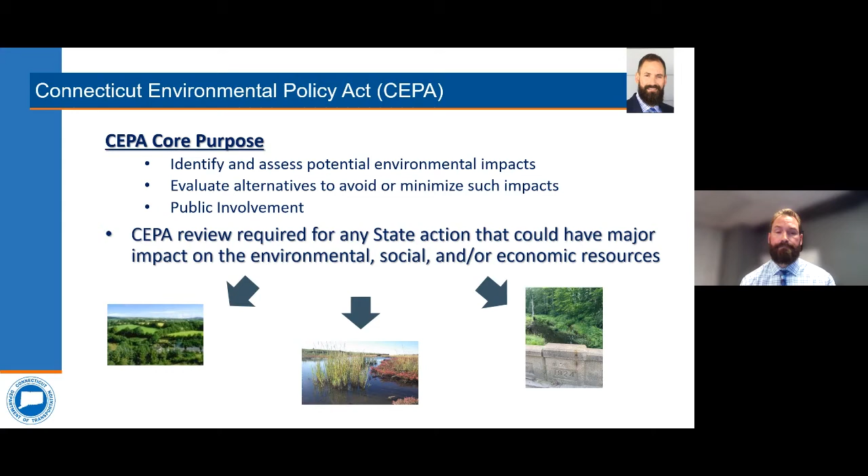We also have to make sure the project complies with the Connecticut State Plan of Conservation and Development. And in the case of this particular project, since it involves federal funding, like the majority of our projects, we also have to look at these resources to ensure compliance with the National Environmental Policy Act, or NEPA.

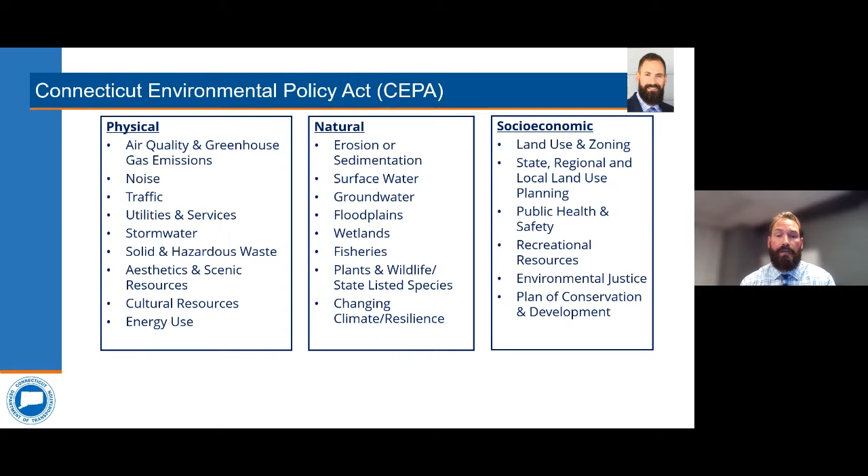Now that you have a general idea of what CEPA is and what needs to be considered under it, what exactly is meant by the term scoping? Scoping is a really specific definition under CEPA, and the scoping process involves a defined set of steps for public outreach. CEPA scoping is defined as the gathering and analysis of information that a state agency will use to establish the extent of environmental review of a proposed state project.

Basically, it's a way for us to get information from the public and other state agencies so we can ultimately determine the proper level of environmental review and documentation needed for a project.

This process begins once we publish a notice of the project in the Environmental Monitor, and that in turn kicks off a minimum 30-day public comment period.

For those not familiar with the Environmental Monitor, it's an online publication run by the Connecticut Council on Environmental Quality, and it tracks projects that go through the CEPA process, including the relevant information for those projects. For this particular project, we published that scoping notice on May 17th, and the comment period will run until the close of business on June 27th.

As I mentioned previously, the idea is to solicit comments from the various Connecticut state regulatory agencies, such as the Department of Energy and Environmental Protection, the Department of Public Health, and the Connecticut State Historic Preservation Office, to name a few, as well as from the various municipalities and the public, to help identify any potential alternatives, and also to help identify any specific environmental resources that need to be analyzed in the project area.

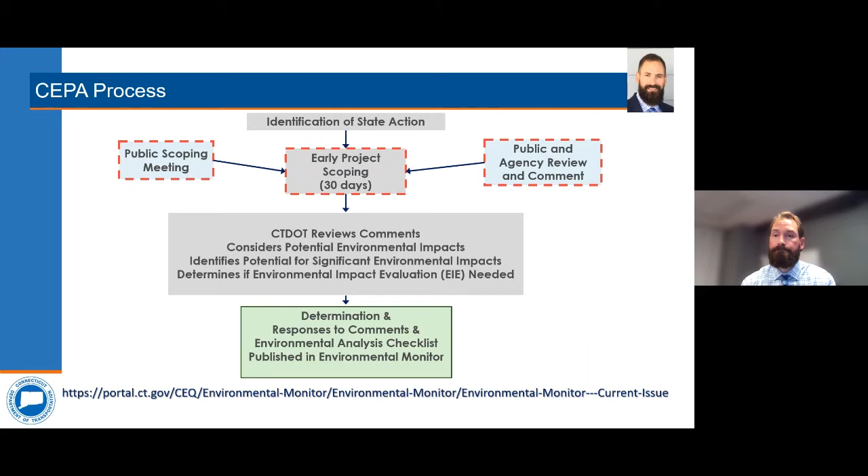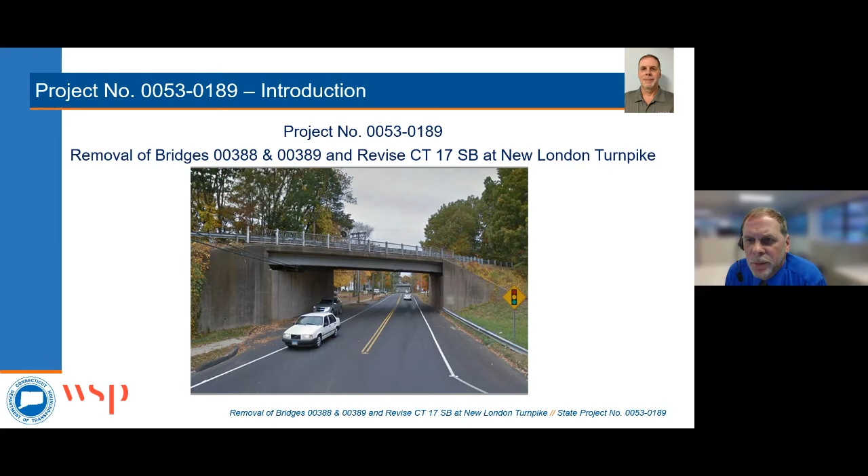Tonight, we will be providing an overview of the project and key details, including proposed plans, an overview of the traffic analysis, discussion of maintenance and protection of traffic, and schedule. I would like to let you know that the plans we are presenting this evening are at a preliminary design level, which is approximately 30%.

I would like to start with an overview of where the project is located. The project is located on the western side of Glastonbury, south of Route 2 and Hebron Avenue. The project limits will extend east-west along New London Turnpike from Sycamore Street to just east of the Williams-Oak Street intersection. The project limits also extend along Route 17 northbound from Hubbard Street to the south to the merge with the Route 17 northbound on-ramp to the north.

Currently, the Route 17 southbound off-ramp splits into two separate ramps at New London Turnpike. One leg of the southbound off-ramp goes to New London Turnpike westbound, and the other goes to the New London William Street East Oak intersection. One of the main purposes of this project is to eliminate the ramp that goes to the Williams Oak intersection and consolidate all ramp traffic to one off-ramp.

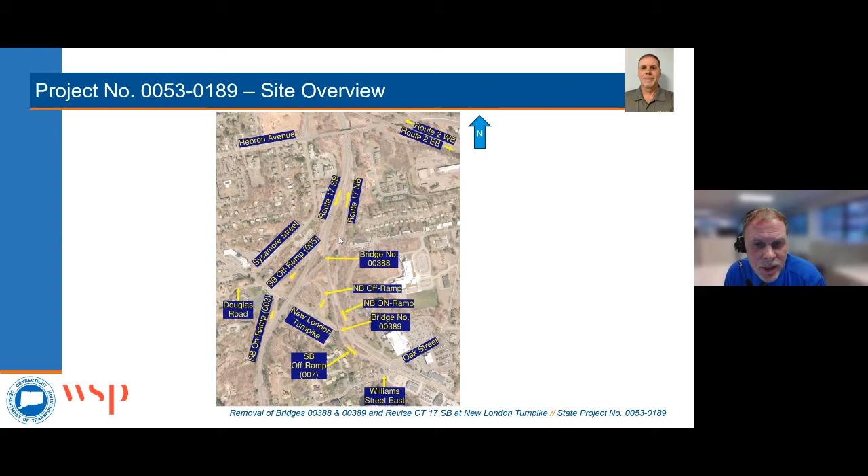This leads into the next slide, the project purpose and need. Due to low traffic volumes and the condition of Bridge 388, this project will remove the Route 17 southbound off-ramp, known as Ramp 7, that currently connects to New London Turnpike at the William Street East Oak Street intersection. By removing this ramp, it provides the following benefits.

One, it eliminates one leg of a five-legged intersection, which improves the geometry as well as traffic flow and safety. It eliminates pavement and two bridge structures along the ramp, one of which, bridge number 388, is rated as structurally deficient and is in poor condition. Eliminating this ramp reduces future maintenance and costs over the long term.

This project will also reconfigure the Route 17 southbound off-ramp, Ramp 5, and the southbound on-ramp, Ramp 3. This reconfiguration will accommodate New London Turnpike eastbound and westbound traffic, as well as all on and off-ramp traffic at a single lane roundabout located just west of Route 17.

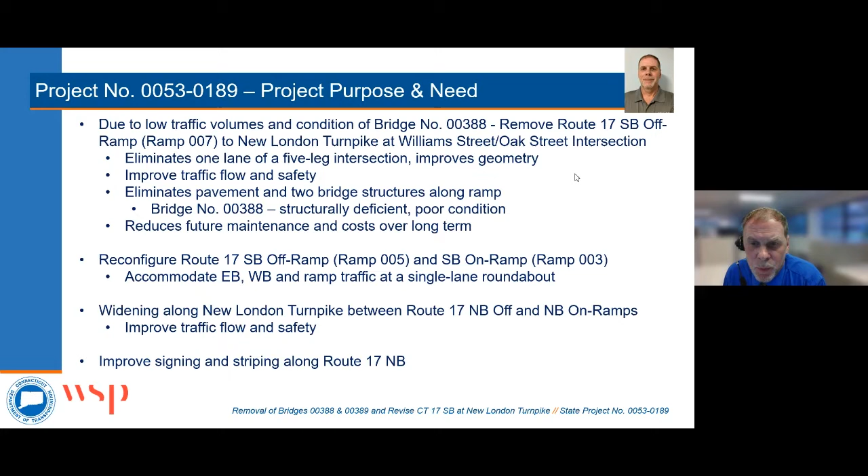This project will also involve widening along New London Turnpike between the Route 17 northbound off and on ramps. This will improve traffic flow and safety within this section of roadway. And lastly, this project will improve the signing and striping along Route 17 northbound, which I'll now discuss.

Currently, Route 17 northbound consists of two through lanes, which start south of Hubbard Street and continue northward. Exit signs for the Route 17 northbound off-ramp to New London Turnpike exit consist of side-mounted signs. The proposed improvements will provide a single through lane along Route 17 northbound, starting at Hubbard Street. The two through lanes will transition down to a single northbound through lane.

A second lane, referred to as an auxiliary lane, will be added from the William Street East on-ramp to the New London Turnpike off-ramp. The auxiliary lane will allow vehicles exiting to New London Turnpike to have a dedicated lane for the off-ramp. A new side-mounted sign will be installed just north of Hubbard Street, and a new overhead cantilever sign will be installed just prior to the off-ramp to New London Turnpike.

This overhead sign will provide improved sightline to vehicular traffic. Additionally, tree trimming will be performed as required for both new signs being proposed. These proposed improvements will provide safer traffic operations for Route 17 northbound traffic at this section of the highway.

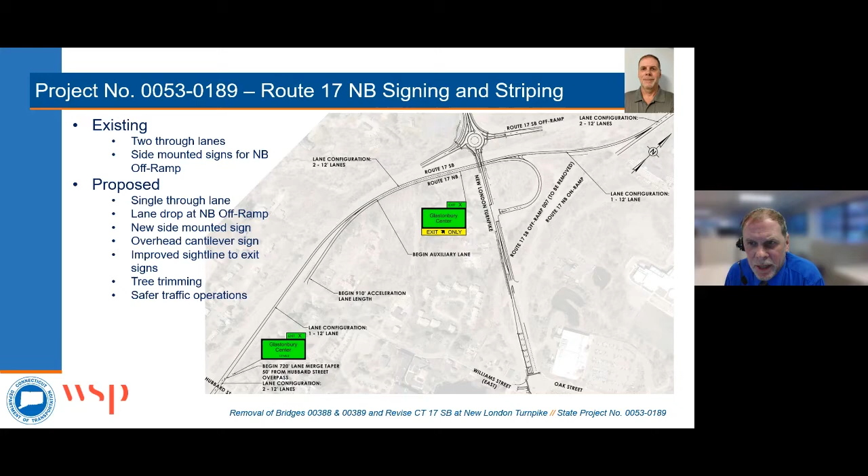Now, moving on to what's being proposed along New London Turnpike. This slide shows the overall improvements being proposed along New London Turnpike, as well as the removal of the Route 17 southbound off-ramp, Ramp 7, that connects at the Williams Oak New London Turnpike intersection. Improvements along New London Turnpike consist of three primary locations.

One, the roundabout and Route 17 southbound off and on ramp realignment located west of Route 17. Two, the widening between the Route 17 northbound off and on ramps. And three, the widening and new signalization at the Williams Oak Street intersection.

The yellow highlighted areas on this image represent where new pavement will be installed. Additionally, new signage and pavement markings will be installed along the improved areas. As seen in the center of the slide, the Route 17 southbound off-ramp will be removed from Route 17 to the New London Turnpike Williams Oak Street intersection. This is approximately 2,200 feet of ramp removal.

Along this ramp, the existing pavement structure will be removed and new grass will be established. Bridge 388, which carries Route 17 northbound over the off-ramp, will be removed, and Bridge 389, which carries the off-ramp over New London Turnpike, will also be removed.

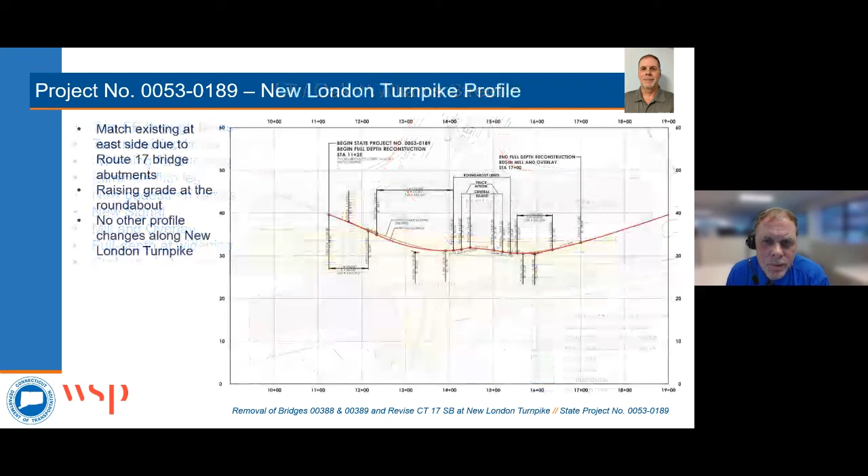Here is the profile of New London Turnpike where the roundabout will be constructed. Looking at the right side of the profile, which is the east side of the roundabout, the profile in this area will match the existing grade due to the proximity of the Route 17 bridge abutments.

Looking at the center of the profile, you can see that there will be a slight raise of the roadway grade at the roundabout. This grade increase is approximately 18 inches.

On the left side of the profile, which is on the west side of the roundabout, the proposed grade generally matches the existing, with the exception that a short portion cuts into the existing grade, to accommodate the roundabout approach geometry and to achieve standard roadway cross slopes in this area. Near the roundabout is the only area along New London Turnpike where there are proposed profile changes under this project.

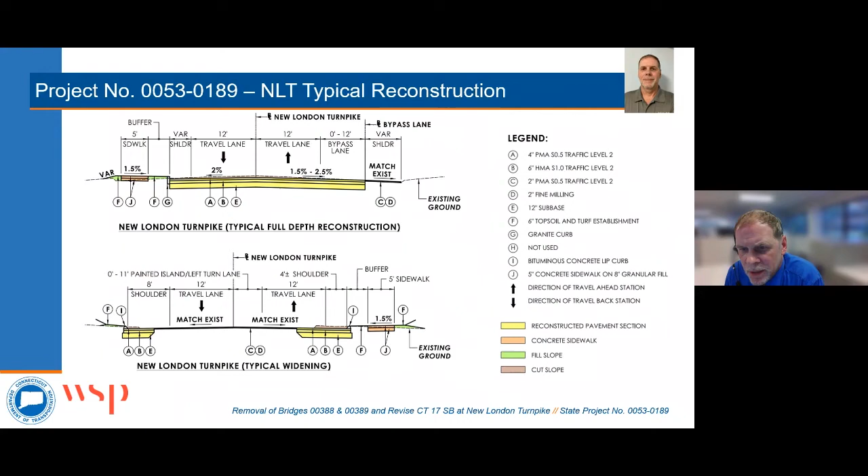I would now like to hand over the presentation to Chris Van Zanten, who is the lead traffic engineer for the project, so he can discuss the traffic design.

Thanks, Steve. Hi, my name is Chris Van Zanten. I'm a senior transportation engineer with VN Engineers. We're working with WSP on the traffic study, traffic modeling, and signal design on the project.

The traffic study includes the following key intersections along New London Turnpike, starting at the northwest Sycamore Street, then Douglas Road, Route 17 southbound on and off ramps, the Route 17 northbound off ramps, the Route 17 northbound on ramps, and the Williams Street East, Oak Street, and Route 17 southbound off ramp.

As part of the study, we performed field review and observations of the intersections along New London Turnpike. We also performed traffic capacity analysis of the existing and future roadway network for both the build and no-build scenarios, to allow for comparison between future conditions both with and without the project, forecasted to the 2023 opening year and 20 years out to 2043.

The no-build condition assumes the existing geometry will remain for these future conditions, and the build condition assumes that the roundabout and all the other geometric improvements mentioned earlier will be constructed.

The traffic projections for the study were provided by the Connecticut DOT Bureau of Policy and Planning and took into account existing traffic as well as future growth in the area. Based on the findings from the analysis, we worked with DOT and the rest of the design team to develop the geometric and signal improvements to accommodate the future traffic while maintaining safe operations for all users of the system.

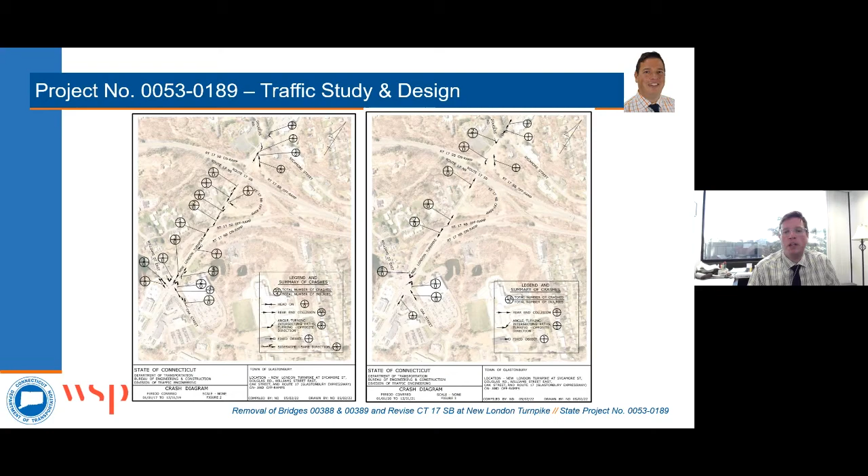Between 2020 and 2021, during the COVID years, there were 14 total crashes with 3 injuries reported. Again, the predominant crash types during this period were rear ends and angle crashes. Crashes were dispersed throughout the study area, with most occurring at the signalized intersection of New London Turnpike with Oak and Williams Street. Next, please.

As part of the traffic modeling work, we investigated the future build conditions of the intersection of New London Turnpike with the Route 17 southbound on and off ramps, two ways: as a signal and a roundabout. Before comparing these options, let's first talk about level of service.

Level of service is one of the performance measures traffic engineers use to assess the operating conditions and capacity of roadways and intersections. It's described in terms of letter grades, similar to the academic grading system A through F, except there's also a letter E. A is the best operation, F is the worst.

We must also make a distinction that level of service criteria for roundabouts and signalized intersections are different. Both criteria are based on calculated delay and V/C ratios, volume to capacity ratios. However, the delay thresholds for determining level of service are much greater for signalized intersections compared to roundabouts and unsignalized intersections. For example, the threshold between level of service E and F is 50 seconds for a roundabout, but 80 seconds per vehicle for signalized intersections. This is based on driver expectancy for the different types of traffic control.

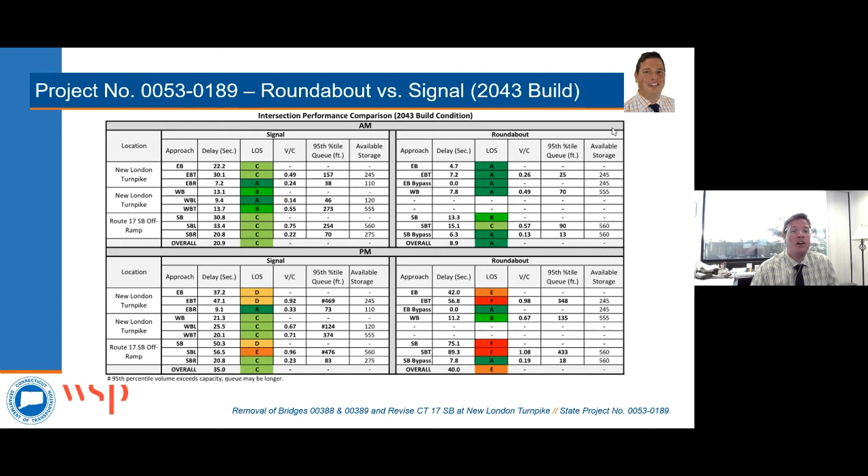The signal currently operates with the eastbound New London Turnpike traffic with an advanced phase, followed by a phase where both approaches on New London Turnpike are able to proceed. Following this phase, the Route 17 southbound off-ramp traffic runs. Lastly, both approaches from Williams and Oak Street are provided a phase with no protected left turns.

The existing signal phasing does not operate efficiently, and all other movements at the intersection must stop when the Route 17 southbound ramp traffic is moving, for a relatively long 20 to 30 second phase.

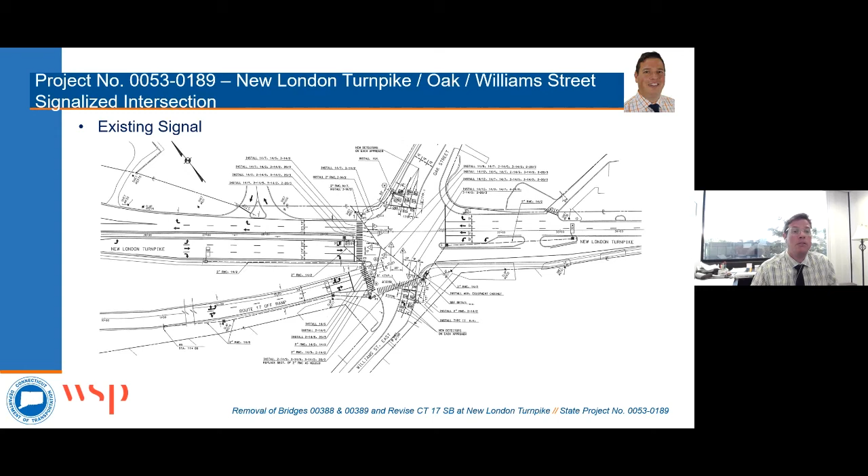The removal of the 5th leg from the intersection allows us to significantly improve operations at the intersection through the elimination of a traffic signal phase and optimization of the phasing and timing at the intersection.

The new signal being installed will use dual quad phasing, which will include protected permitted left turn phasing for all left turns from New London Turnpike, Oak Street, and Williams Street East, prior to the release of traffic from the opposing approach. Other than the removal of the Route 17 southbound leg, the main geometric change at this location will be the minor restriping of the eastbound New London Turnpike approach to allow for an exclusive left turn lane, a through lane, and a shared through-right lane.

Minor widening and striping is proposed to allow the two through lanes to merge downstream of the intersection to allow for additional capacity. The existing exclusive pedestrian phasing will be maintained for the intersection.

All the signal equipment at the intersection will be replaced as part of the project. This includes new APS accessible pedestrian signal push buttons, LED signal heads, countdown pedestrian heads, 360 video detection, and radar advanced vehicle detection. The yellow and all-red clearance intervals are also being recalculated at the intersection to provide adequate vehicle clearances from subsequent phases and allow for safety.

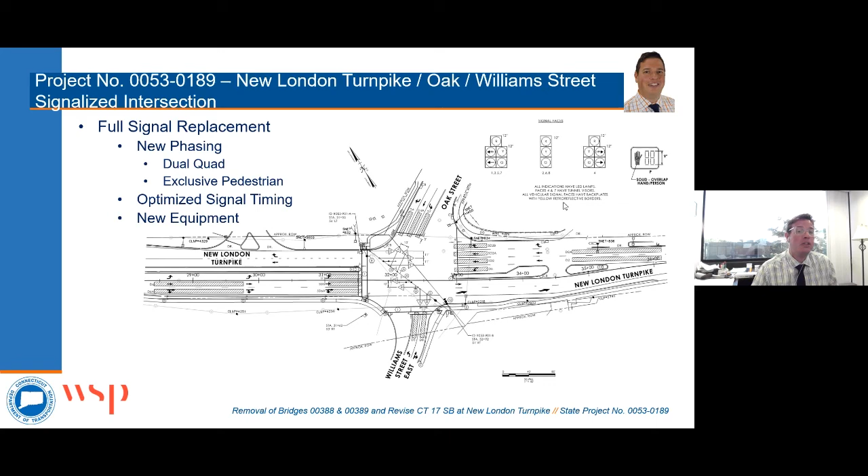The problem movements in the no-build condition will experience significant improvement to level of service and delay in the build condition.

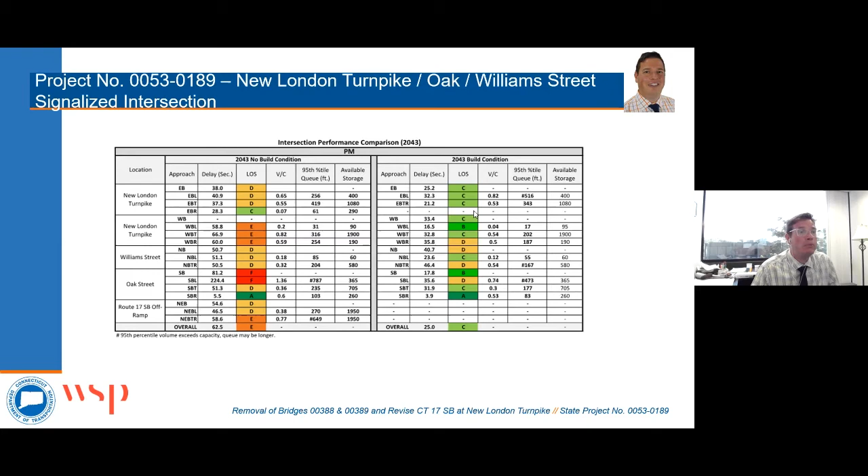Thank you, Chris. Now I'm going to discuss how the project will be constructed. For the roundabout construction, the intent is to maintain through traffic on New London Turnpike, one lane in each direction, and maintain one lane on each Route 17 ramp during construction.

Pedestrian traffic will also be maintained during construction. To complete the roundabout construction, we anticipate that 4 major stages will be required, with many substages within the major stages, in order to maintain continuous vehicular and pedestrian flow through the site.

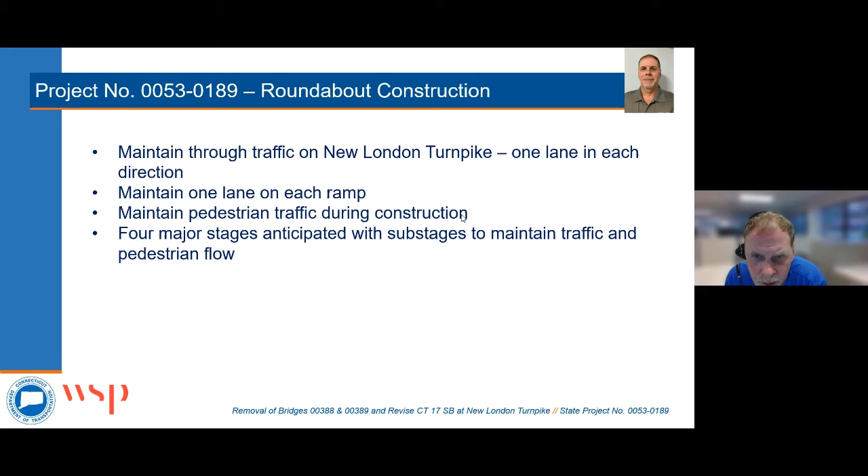For the widening on New London Turnpike between the Route 17 northbound off and on ramps, the existing traffic patterns will be maintained while the north and south side of the roadway is widened. The majority of the sidewalk will be constructed on the south side of the existing sidewalk, allowing pedestrian traffic to use the existing sidewalk while the new walk is being built. Minimal disruption to pedestrian traffic is expected when the new sidewalk gets connected to the existing sidewalk.

Moving further to the east, for the widening of New London Turnpike at the intersection with Williams Street East and Oak Street, the existing traffic patterns will be maintained while the south side of the roadway is widened and the new traffic signal equipment is installed.

Where possible, the sidewalk will be constructed on the south side of the existing sidewalk first, allowing pedestrian traffic to use the existing sidewalk while new sections are being built. Minimal disruption to pedestrian traffic is expected when the new sidewalks get connected to the existing sidewalks, or in areas where the new sidewalk will be installed in the same location as the existing walk.

When Bridge 388 is removed, Route 17 northbound will need to be closed and traffic will need to be detoured. At least 2 weeks prior to the closure, changeable message signs will be installed to notify the public of the upcoming closure.

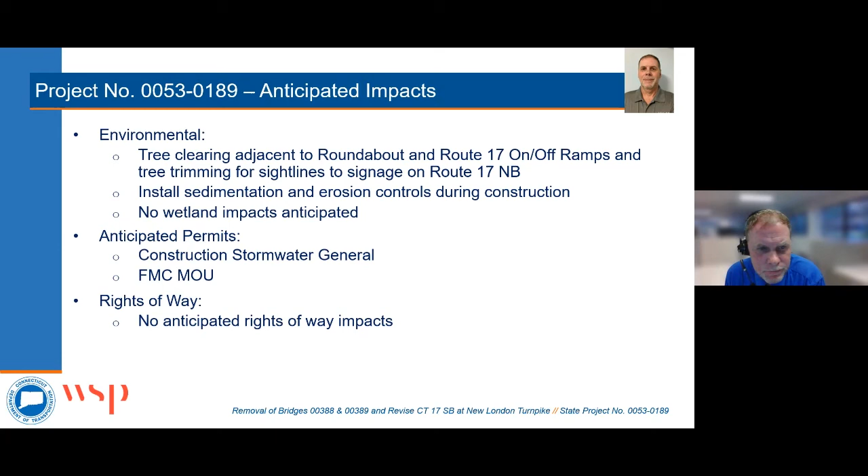Additional impacts are to utilities. Utility poles along New London Turnpike will need to be relocated to construct the roundabout, as well as for widening between the Route 17 northbound on and off ramps, and for the widening at the bus stop at the New London Turnpike Williams Oak intersection.

For the removal of Bridge 389, existing communication lines that go on the bridge will need to be protected in place or relocated. Also, a fire hydrant adjacent to New London Turnpike and near the existing Route 17 southbound ramp 5 will need to be relocated.

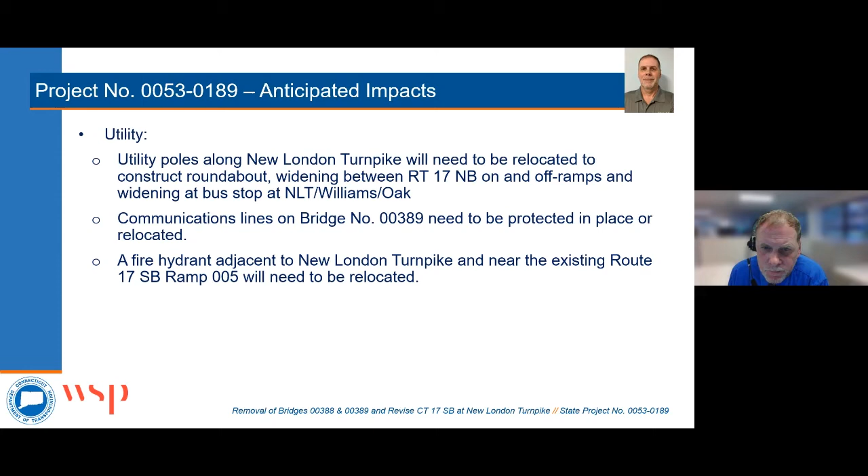So, schedule and cost. The anticipated construction start for this project is spring of 2024, with a duration of 2 construction seasons, putting the anticipated construction end date in the fall of 2025. The anticipated construction cost at this point is approximately $6.3 million, with 80% federal funds and 20% state funds anticipated to be used. I would like to note that this schedule and cost are preliminary and are subject to change.

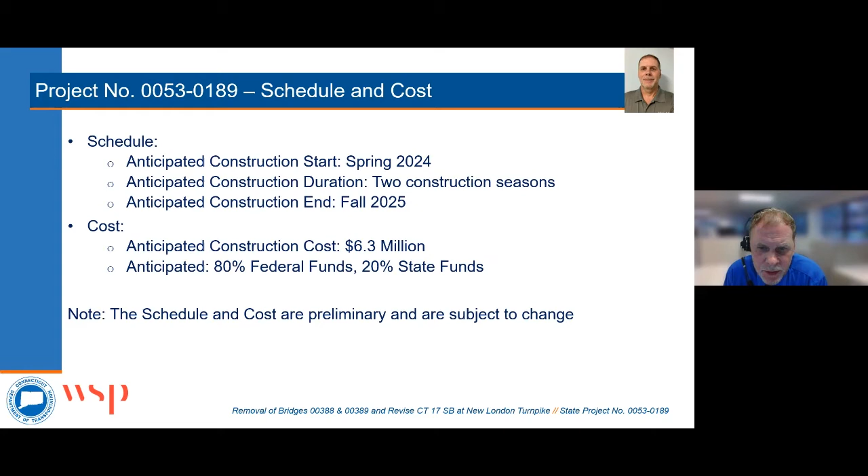This concludes our design presentation. I will now turn things over to Aaron Foster.

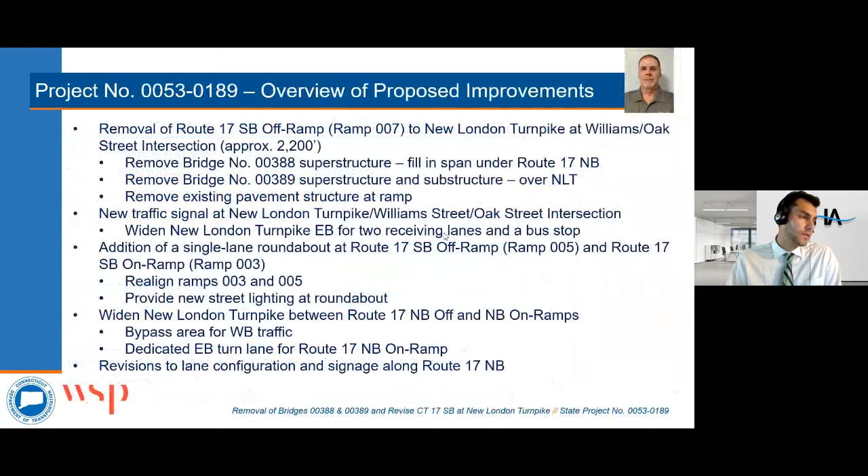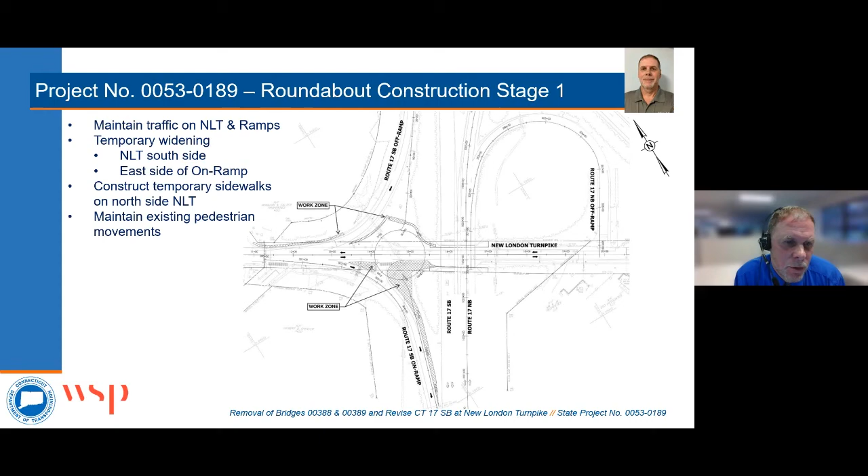There was a second part to this question. What will happen to the current raise grades for those ramps? As mentioned in the presentation, both ramps right now, because of the way the roundabout is going to be constructed, require cut at both of those ramps. However, both of those ramps will still be raised grade going up to and down from Route 17. For example, the southbound off-ramp has about a 2-foot maximum cut.

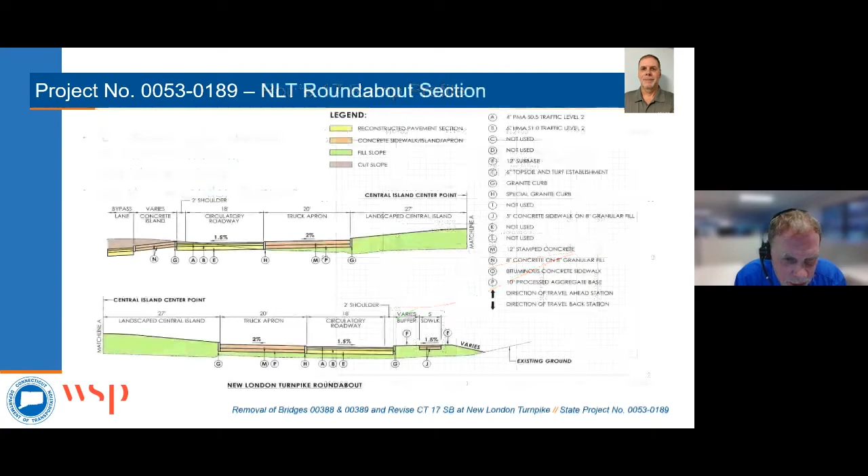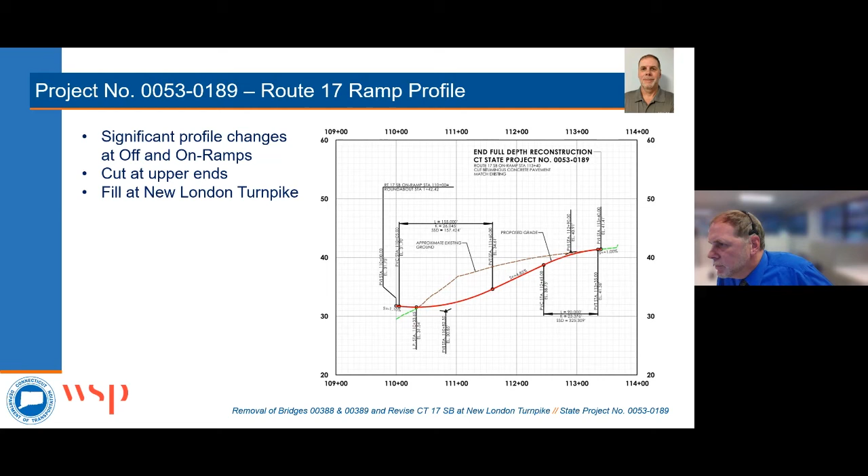Lastly, what will happen to the leftover land? Will that be retained by the state or turned over to the town?

I think we're talking about the land in the regions where we're removing the existing off-ramp, just so folks can understand where that is. Don, I'm going to call on you.

Thanks, Aaron. Don Worsh from CHA. All of the state-owned land on the north side of New London Turnpike, bounded by the on-ramp to 17 northbound and the right-hand off-ramp off of 17 southbound, that is all going to remain ConnDOT property as it is bounded within the interchange itself.

The portion of land on the south side of New London Turnpike, where the left-hand off-ramp turns and joins the current intersection with Oak Street and Williams Street, will no longer be bounded with the interchange once the ramp is removed.

The Office of Rights-of-Way at ConnDOT has had discussions with the town about what the future of that property may be. Typically, the state does not like to divest land that they currently own, but they are in discussions with the town to see if that is valuable land to them. It's possible that they may end up giving it to the town of Glastonbury. Thank you.

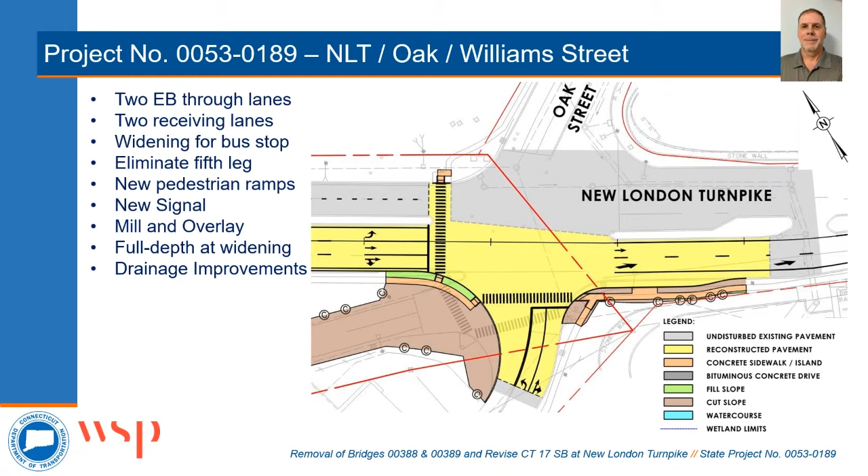Thanks, Don. There's a few more questions that have been rolling in. Let me read a few of them off. There's some folks that represent Bike Walk Glastonbury, and someone owns a business in the one-stop plaza adjacent to the project site. What are the specific plans for bike and pedestrian safety?

Steve, I'll turn that over to you. Thank you, Aaron. Currently, there are no specific plans for bike lane improvements for this project. However, there are a lot of plans for pedestrian safety, so I'll discuss this one first.

Around the roundabout, existing sidewalk patterns are going to remain along the south side of New London Turnpike, and the sidewalk will come around, cross the on-ramp, and continue on. We are adding a sidewalk under the Route 17 bridge, where there currently is none, which will provide better safety than exists today. There'll be a shelf separating the sidewalk and the roadway.

Also at the roundabout, pedestrians could cross New London Turnpike to the north. There will be concrete splitter islands at the two crossings on the on-ramp and New London Turnpike, providing pedestrian refuge if someone gets trapped while vehicles are coming through. There's also a sidewalk connection on the north side of New London Turnpike connecting to a newer section of sidewalk recently extended at Sycamore Street.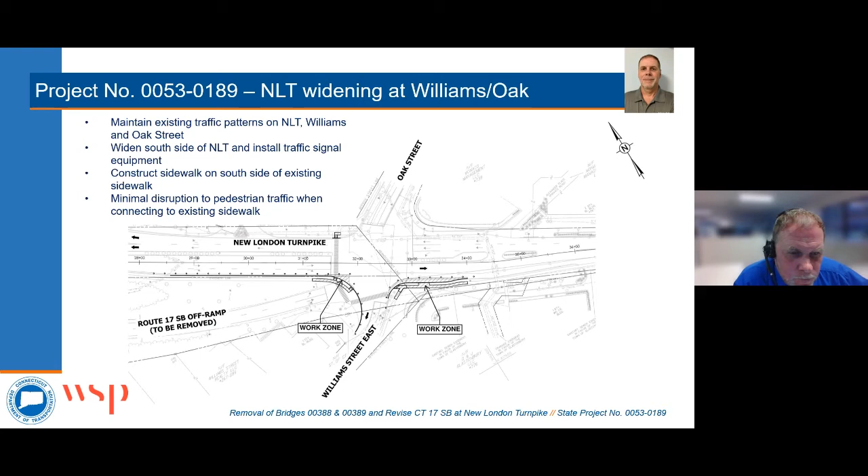Same thing for when they're doing the widening between the northbound on and off ramps - very similar, maintaining one lane in each direction while the contractor does their widening. They won't be working on both sides simultaneously, they'll do one side then the other, so they could shift traffic as required and maintain the required travel lane widths through that area. The work area will just be drummed off.

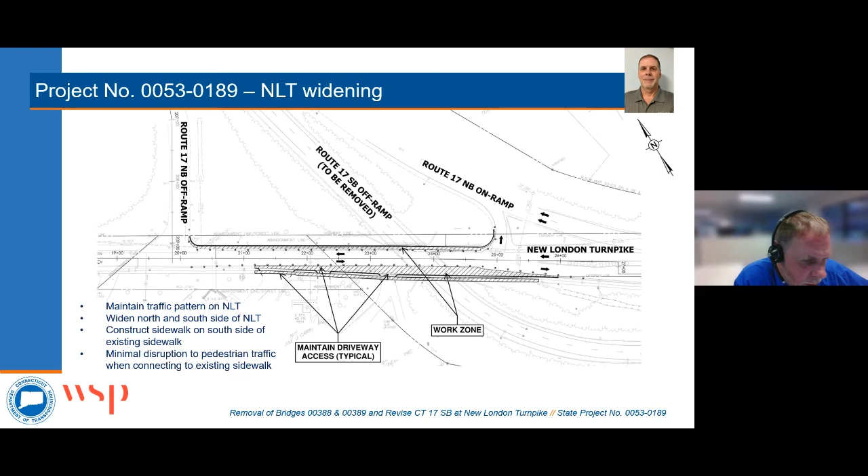If you could go to the backup slides for the stage construction for the roundabout - as I mentioned, while the roundabout is constructed, New London Turnpike and the on and off ramp traffic will be maintained. In stage one, on the north side of the roadway, they're going to be building some temporary and part of the permanent sidewalks.

To accommodate pedestrian travel through the area in future stages, there'll be some temporary widening on the south side of New London Turnpike, as well as some temporary widening on the Route 17 southbound on-ramp.

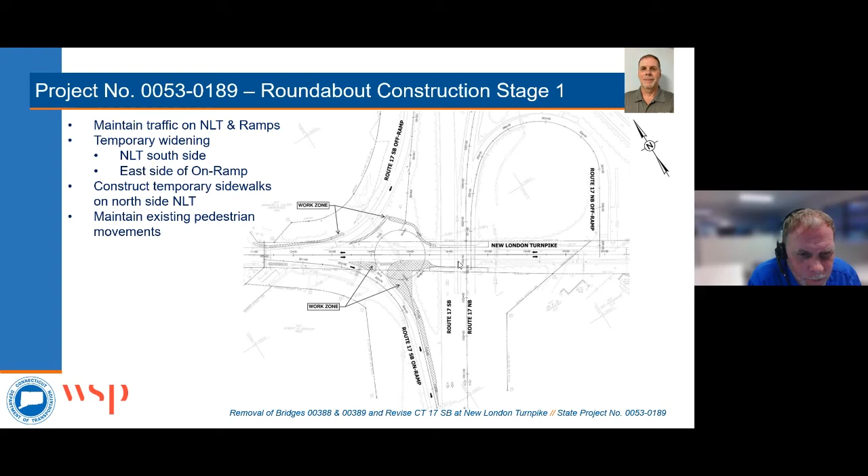Then in stage 1 or 2, once they've done the temporary widening on the south side, they move on to stage 2. Traffic will be shifted to the south, one lane in each direction on New London Turnpike, while they do work to the north. They're also going to be shifting traffic on both ramps and working on one side of each ramp.

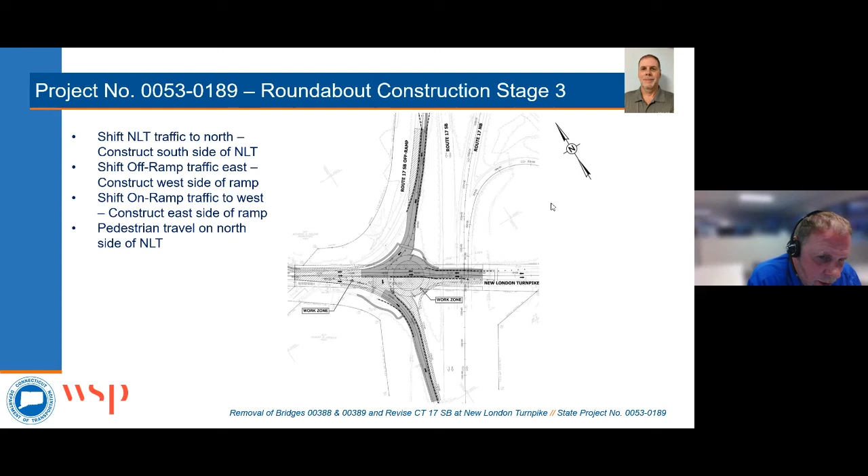Moving on to the third stage, traffic is going to be shifted to the north. They're going to be constructing on the south side of New London Turnpike, and there's also going to be ramp work going on. At the same time, for stages 2 and 3, there's going to be a pedestrian route.

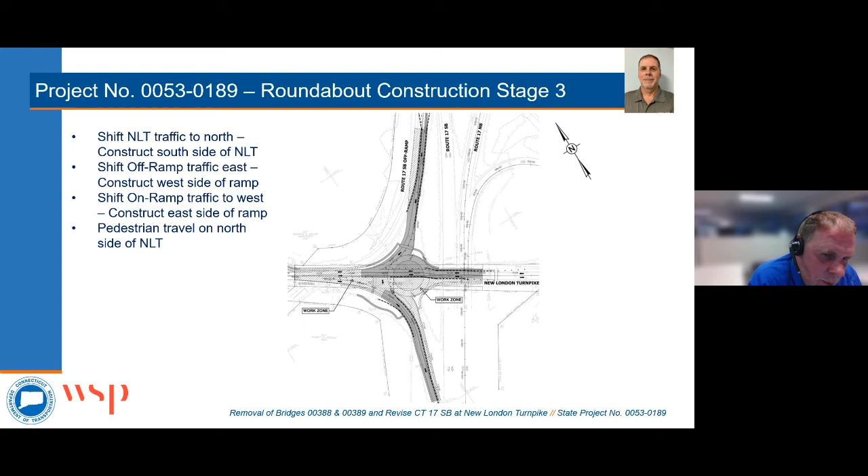And then the last stage of construction, stage 4, vehicular traffic will be in its final condition, going around the roundabout. The contractor will be completing the center island, removing any areas where they had temporary pavement, but always maintaining traffic on New London Turnpike.

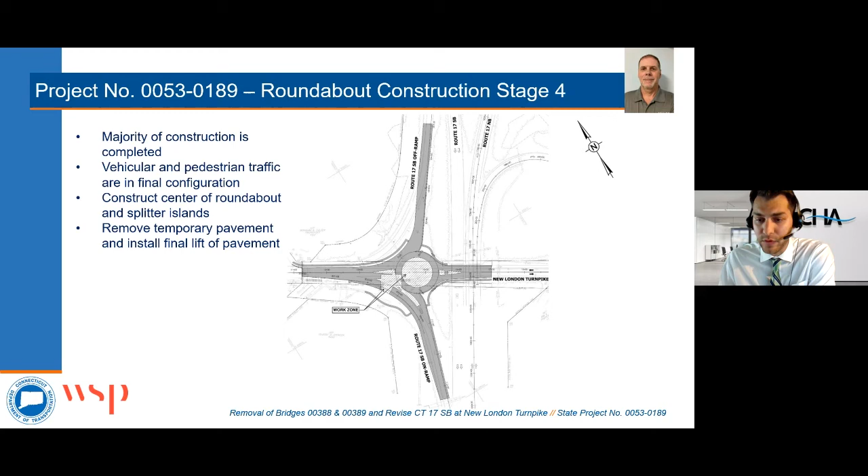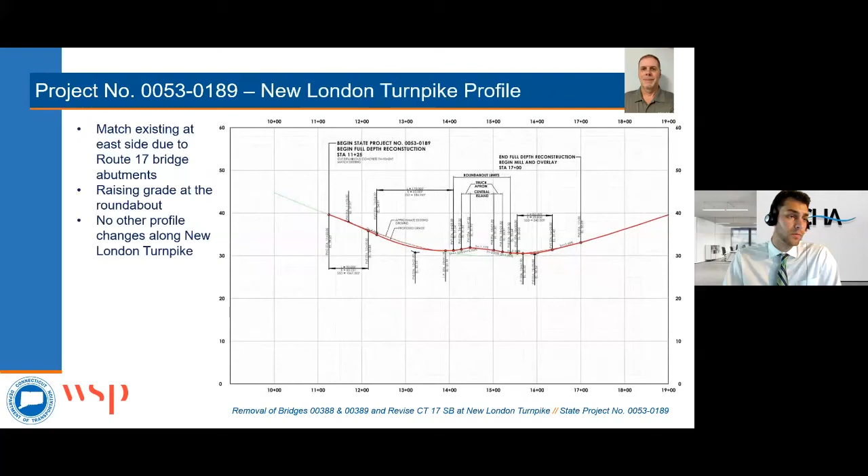Thank you for the question. I'm going to start with the north side of the roundabout. We were meeting with the town and discussing sidewalk on the north side, and we came to the decision to add a sidewalk on the north side of the roundabout. Hopefully that helps with the later part of your statement.

On the north side from Sycamore Street, we will have a sidewalk on the north side of New London Turnpike that follows New London Turnpike, crosses the off-ramp, continues on New London Turnpike, and then it has a sidewalk so that pedestrians can cross over, or cyclists coming through could dismount and use this sidewalk.

There was also a statement here about widening New London Turnpike. We have a couple of minor widenings on New London Turnpike. This is to allow any passing cars to pass a stopped car that's turning into a driveway on the southern side. As there's a few businesses, we're trying to prevent major buildup interfering with other intersections. We're also adding a small turning bay in this region so that we could continue the flow of traffic while providing standard lane widths and shoulder widths for any pedestrians or cyclists that are needed.

Steve, you have any addition to that? Actually, no, I thought you explained it well for the widening areas. I think I got all the questions. If there's any other follow-up questions, feel free to send them to the email after the meeting or send them tonight. We'll be here for a little while.

I think we have another question coming in. When removing the bridge that crosses New London Turnpike, will the raised ramp construction on either side be removed? Also, the town shows a stream there also. I'm gonna just note the last part.

Yeah, there is a stream there currently running under the roundabout. That little water course will be maintained, and we won't be touching it. There's a couple other little percolating water bodies. Those will be maintained and continued during and after construction.

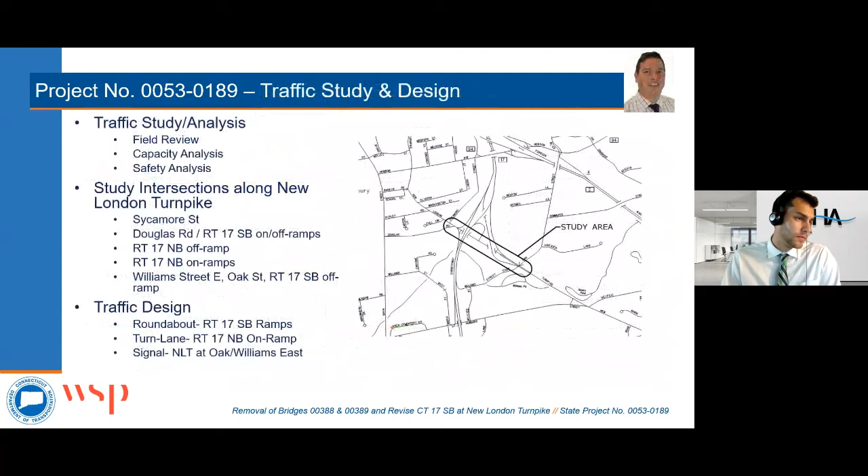For when removing the bridges that cross New London Turnpike, will the raised ramp construction on either side be removed? Let's see, do we have a slide in here showing that? I don't believe there's a slide showing the bridge removal, but the idea is that we will grade out at 2-to-1 slopes from the roadway until we reach the existing ramp grades, and that will all be turf establishment and grass over. All the pavement of that ramp will be removed.

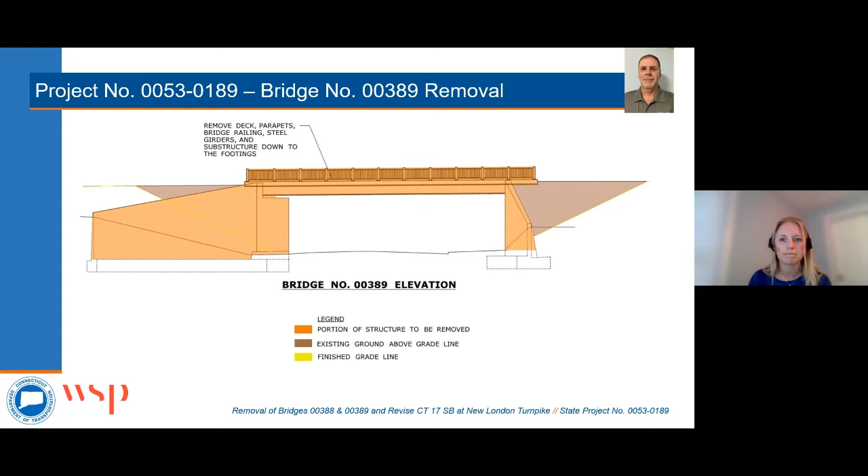Thanks, Katie. I think there's a question coming in about benefits and advantages of roundabouts, and if tractor trailers will be able to handle this. Let me read this. Give me a second.

The question or statement is: one of the advantages of the current setup has been that it has helped tractor trailer drivers turn better. Will tractor trailers be able to handle this roundabout well enough to keep traffic moving at a reasonable rate? Also, there is significant traffic on New London Turnpike at the off-peak hour of 6 p.m., and road closure at that time would significantly disturb traffic. Would it be possible for closure times to be changed to accommodate this?

Steve, do you have any initial response to this? Yeah, I'll start with the first part. So the roundabout, if you could go to that slide, Aaron, the roundabout was designed to handle WB67, which is the largest size tractor trailer.

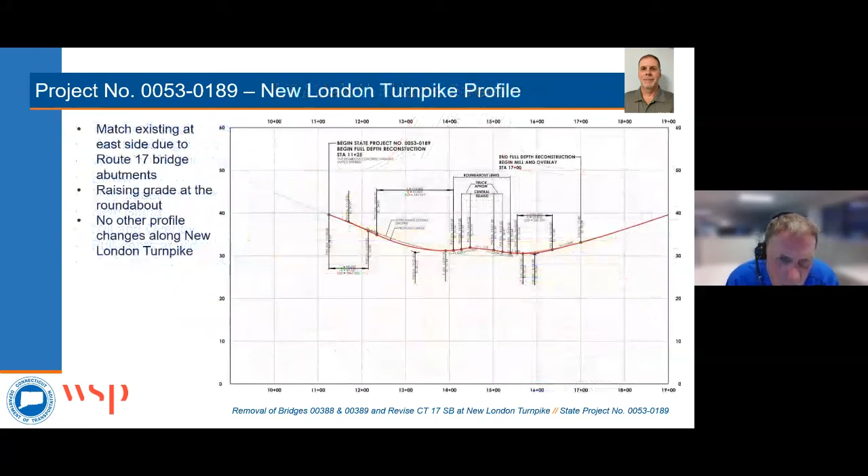So it will make all movements. If you could go to the next slide, Aaron, or even the cross section a few slides down. The circulatory roadway is an 18-foot wide roadway with a 2-foot shoulder, and then there's a mountable truck apron that's 20 feet. So those larger design vehicles, when they maneuver through the roundabout, the tractor trailers will mount the truck apron but will not extend into the landscaped central island. So they could easily make that turn.

Katie, what kind of speeds would they be making through that? They'd be very low, but I think you analyzed that. The WB67 speeds are low. The circulatory roadway itself is about a 15 mile per hour speed, with entry speeds of about 20 to 22 miles an hour.

Okay, there's an additional question in here about the off-peak hour from 6 p.m. I might ask you to weigh in a little bit on the traffic, Chris, but to discuss it first, we could certainly look at that and make adjustments for those hours. The intent was we could relook at what the actual counts show, what the peak times are. But the intent is for that bridge work, that closure of New London Turnpike, to take place during the off-peak hours, so as not to disrupt traffic.

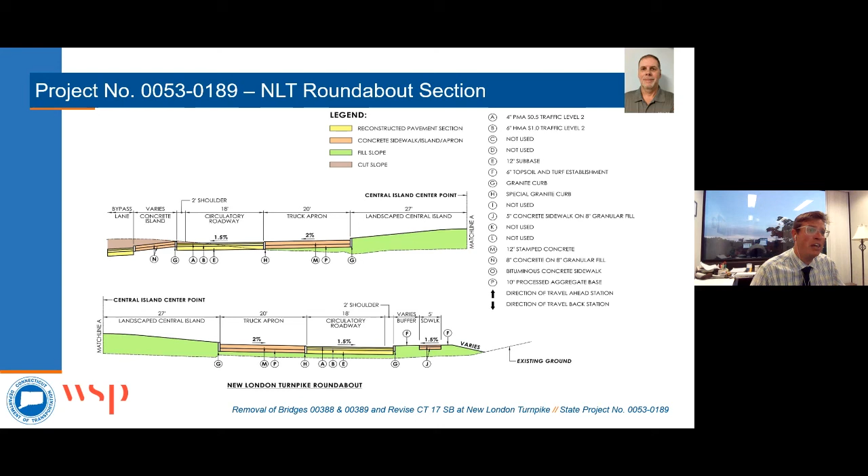There's a question asked about the speeds across the crosswalk. Can you remind me what those speeds were? The entry speeds into the roundabout are about 20 to 22 miles per hour. As you approach at the crosswalks, the vertical geometry accommodates 25 on the approaches, and then as you enter it's about 22.

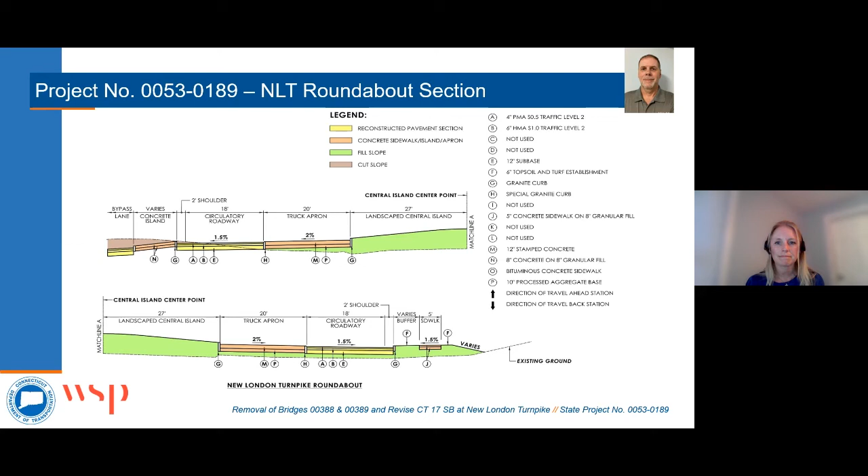Thanks Katie, and thanks Chris for your previous answer. I think there's more in that question. Steve, do you have anything else to add? I wanted to note part of that talked about whether additional cheaper safety measures have been considered. Well, I think Chris did answer that - everything in that question has been answered.

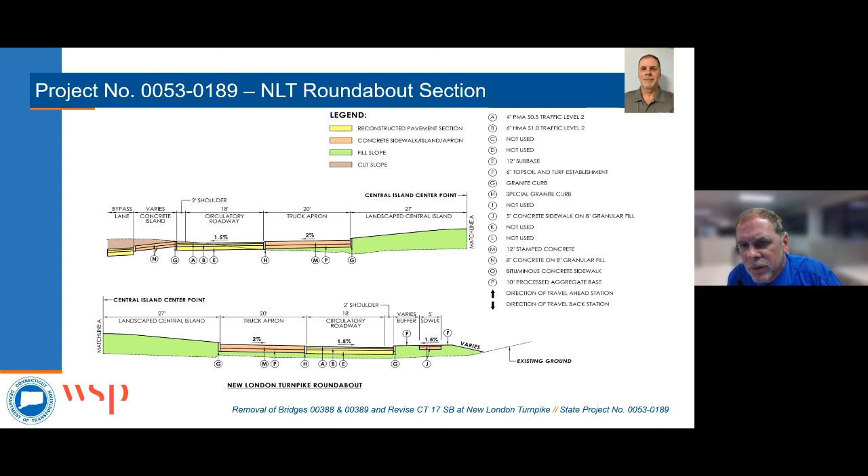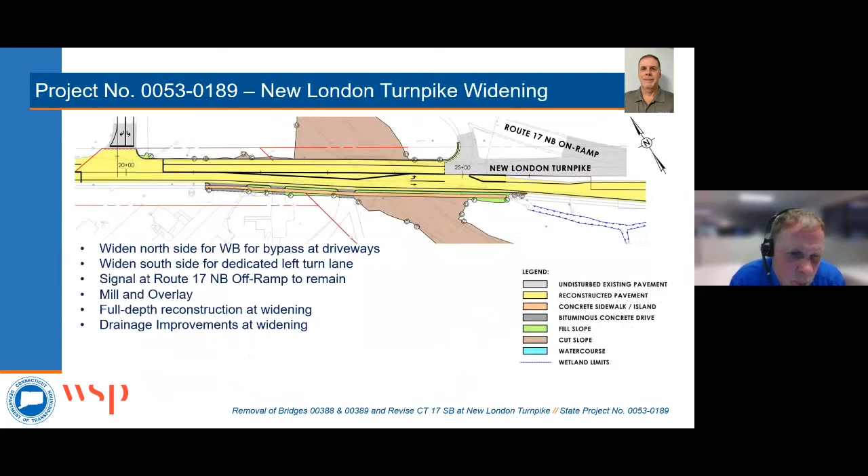Part of that, I think, is a spinoff - is there a replanting plan for the areas left? What we were anticipating was that the removal of the ramp would be seeded.

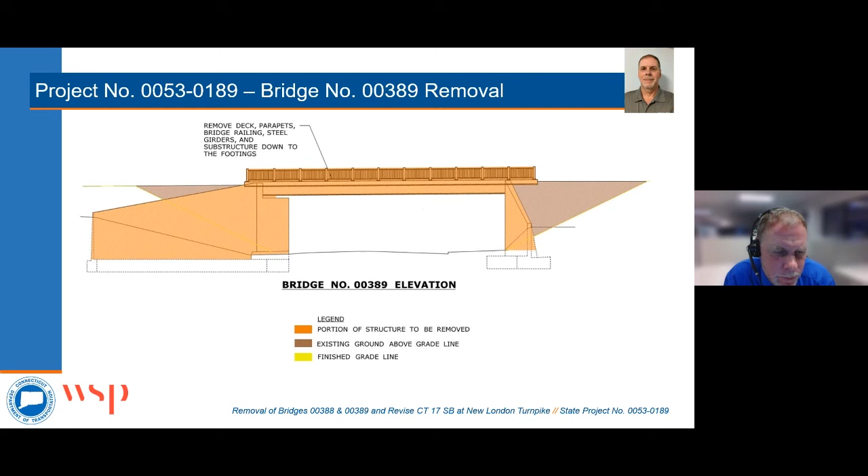If you go back to that cross section for the ramp, Aaron, where bridge 388 is going to be removed - for both bridges, we're anticipating it's just going to be grass side slopes at both locations, as well as for the removal of the southbound off ramp. That's the one that's about 2,200 feet of ramp removal.

Now, I don't know if there's been discussions, Aaron - has there been any discussion on other treatments for those areas? I think at this point it's just a conservation seeding mix for any of the removed sections. Thanks, Steve, for answering that.

I think we have another question - to identify the speeds across the crosswalk on the roundabout bypass roadways. They appear to be very fast. I think Katie just mentioned that they're 20 to 25 miles an hour in that region, at the bypass crosswalk. Katie, do you have a response to that? No, that's correct, Aaron.

Just a supplemental answer to one of the previous questions about the closures. Oftentimes the department will use accelerated bridge construction for bridge closures and detours, trying to limit the impact time of the closure to likely a weekend, if not less. Since these are just removals and not building a whole new bridge, that's significantly easier than a full build construction. WSP has a significant amount of experience with accelerated bridge construction, as well as the department overall. These locations, since we're just removing them, especially the one over New London Turnpike, should be fairly short in duration.

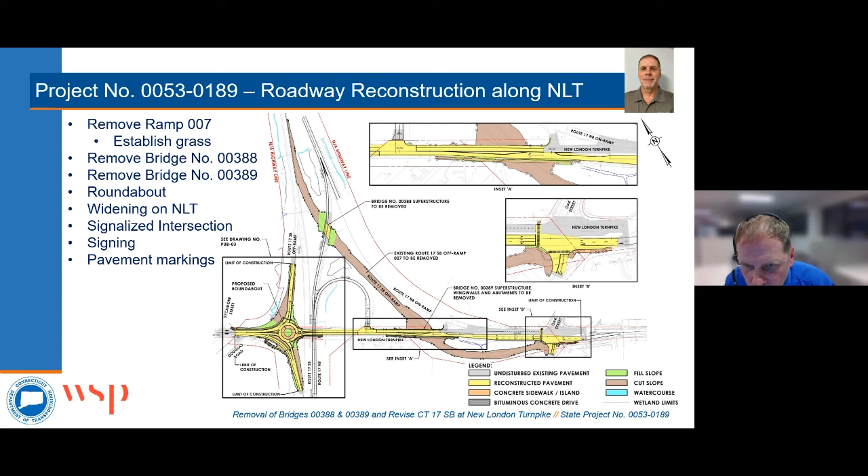There's a follow-up question about entry speeds at the bypass crosswalk. I'm going to zoom to this slide - there are two lanes, one from the off-ramp that goes directly onto New London Turnpike, and one from New London Turnpike that goes onto the on-ramp. Katie, do you have those speeds for those ramps at the crosswalk locations? Again, the horizontal and vertical geometry for those ramps were designed for 25-mile-per-hour speeds.

As far as any ped buttons or warning lights, are we proposing those types of signals at this location, Chris? No, we're not. There is signage - Katie, you've got a comprehensive signage and marking plan to provide advanced warning for vehicles traveling along that slip ramp. Correct, we do have advanced warning signage for the roundabout and pedestrian signage highlighting crossing locations, as well as yield markings at the roundabout.

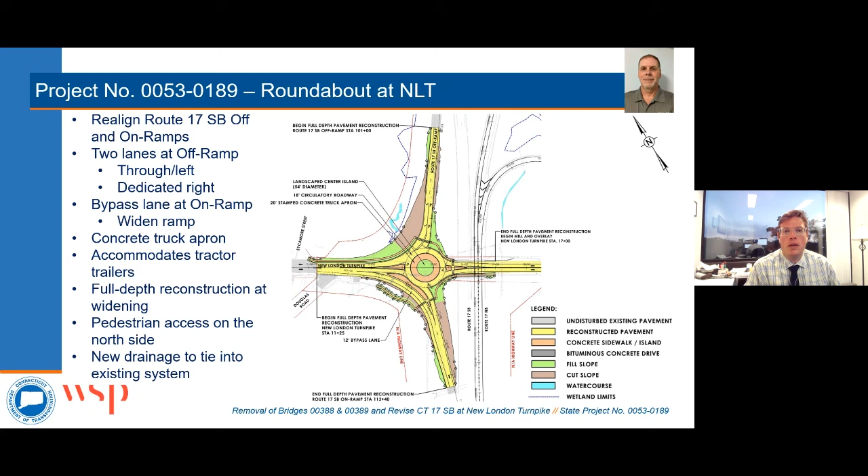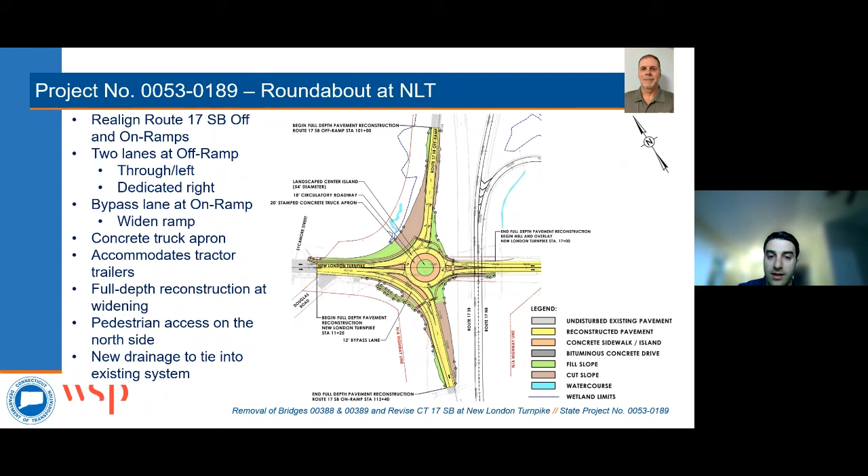And I think, Derek, you want to have some input there? Yeah, thanks, Aaron. So just to address the comment about 25 miles an hour, we'll take a look a bit more into that. I know that's what we're designing for, but we're taking that comment to heart, and we'll just take a look at those speeds for that bypass.